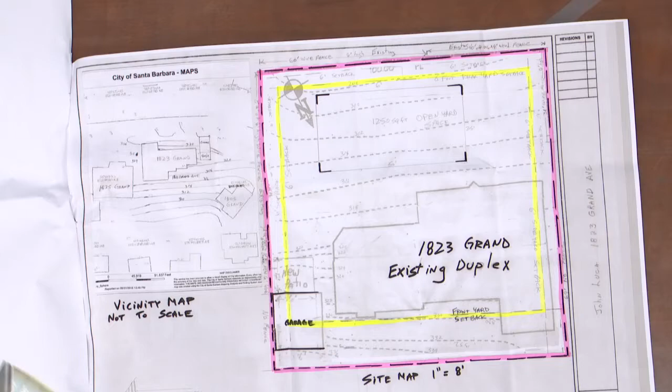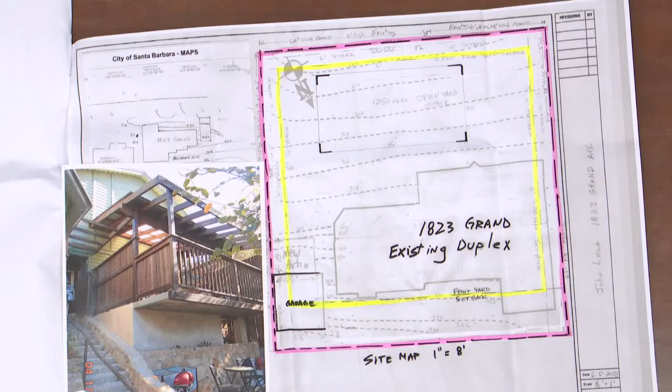This includes things such as the foundation under the garage being under construction without a permit, new electrical in the garage, the rear cantilever deck, the roof cover over the rear deck or patio, new windows and doors in the storage room underneath the garage, new incoming water plumbing line from the street to the house, and a washer and dryer with associated electrical plumbing and venting in the crawl space.

Let me flip. So the duplex is shown here, and this is the lower level, and so the washer and dryer was installed in this area that is existing crawl space.

So the project was reviewed by the Architectural Board of Review on February 20th, 2018, with favorable comments. They specifically noted the construction, the patio and patio cover, is compatible with what is existing and is not visible from the street.

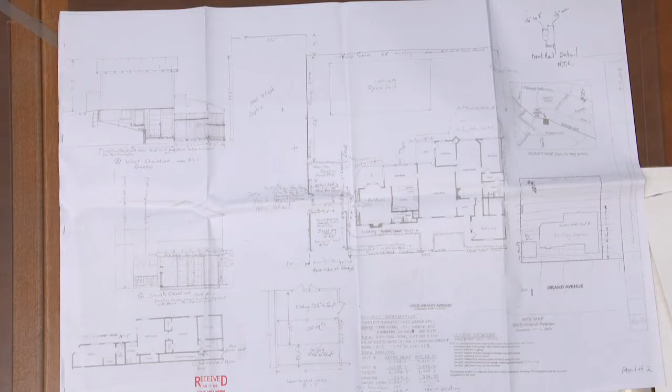The project does require what's called a minor zoning exception for the as-built doors in the storage room due to their nearness to the interior property line. And staff, the design review board, again, favorably reviewed the project.

Staff does have a recommended condition of approval that the storage room be noted as not habitable space on the floor plans, not to be used as sleeping purposes or a bedroom or something like that.

The lot is non-conforming to density with 2 units on the lot. With a lot of this size, slope, and zone, typically only 1 would be allowed, so it is legal non-conforming.

The legalization of the as-built work except the laundry facilities does not constitute new floor area. The laundry room is an allowable addition.

There are caveats that a maximum size of 50 square feet of new floor area for an individual unit is allowable. However, we do have a recommended condition of approval to note that the laundry room area in the crawl space would need to be walled off to make sure it's a maximum of 50 square feet and not the entire area becoming new floor area.

Staff is supportive of the proposed patio and patio cover in the setback due to existing screening from the street with the existing garage, existing screening from the adjacent neighbor with fencing and landscaping as seen here. The closest neighbor is approximately 40 feet away, so staff does not have privacy concerns or privacy impacts being anticipated.

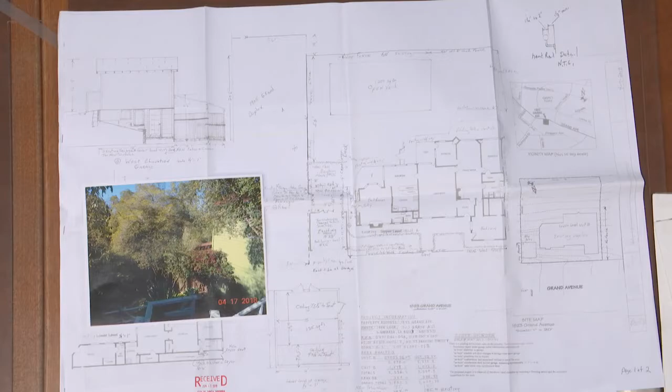I do have some questions regarding the number of things that occurred on the site without the benefit of a building permit, some of which are listed in the staff report. One is the foundation under the garage is under construction. What types of changes occurred to the foundation? Was it dug out and reinforced, or what was this area used for before? There are notes that it was storage, but what is the scope of the as-built work?

Basically, what happened was the olive tree next door had pushed the foundation in the rear, so the wall is like this. We got the permit to do that as the earthquake seismic retrofit, right after the fact. So basically there was a big hole.

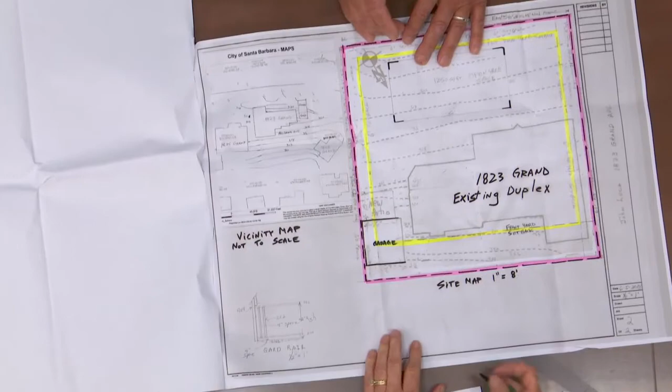So the garage right in here — the foundation had been removed when it was cited. Then we put all that back in using the seismic retrofit.

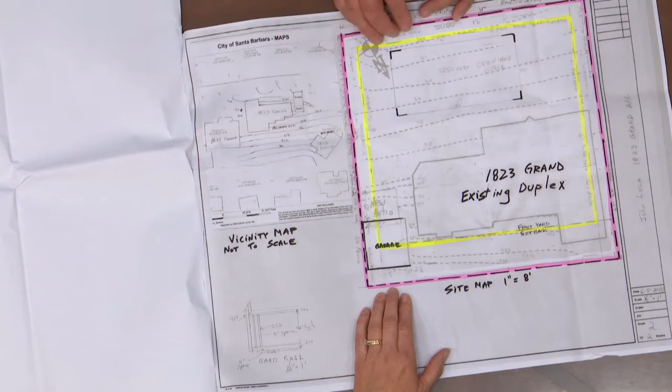But in the storage area here, what types of work were done as part of the foundation in this area? There was basically a slab put in underneath — it was just all dirt. This wall and that one were put in because it was the same problem as up here: the dirt on the outside was rotting the base of the wood, so we raised it up so it wasn't in the dirt. It was totally unfinished, and now it's finished.

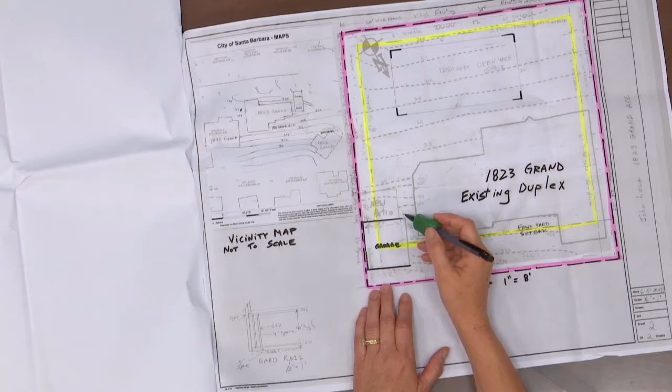What was the head height in that area? It's the same as now, like 7 feet. Okay, and then underneath it, I noticed here—

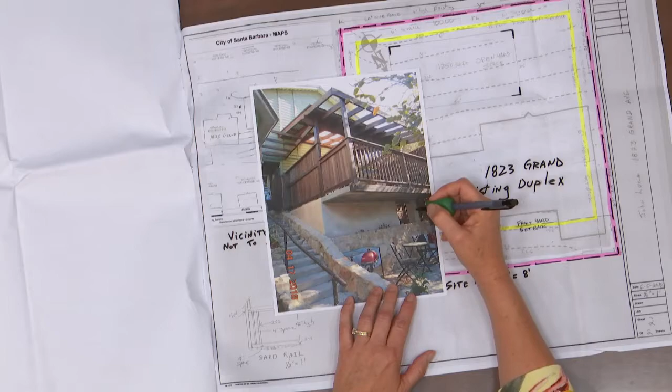In terms of understory, here's an opening. What's used underneath in this area now? That is all that's there, so it's open — it's still open here, it's not enclosed. This is all outside, this isn't in the garage, right underneath. So the garage is up here, and then there's storage underneath.

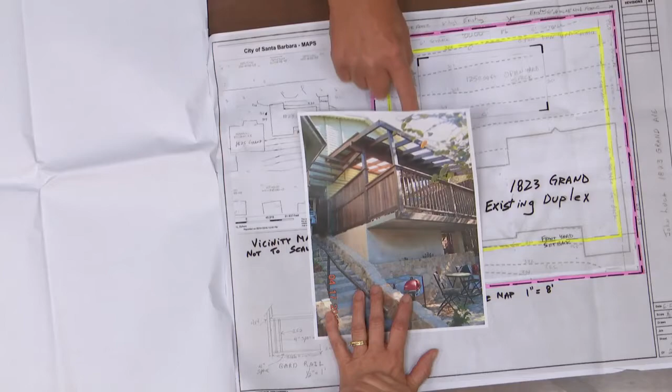And now this is all new here. What's under here, is it all dirt, open? No, it's all dirt. This is solid. If you like, right here, this is about where you're pointing.

Essentially there's this retaining wall that's 4 feet. Which is at this line, or is it behind it? So it's this one right here — this line is 4 feet, and it goes all the way across, and once it gets right to there, there's a post right here, and then there's another retaining wall right behind that.

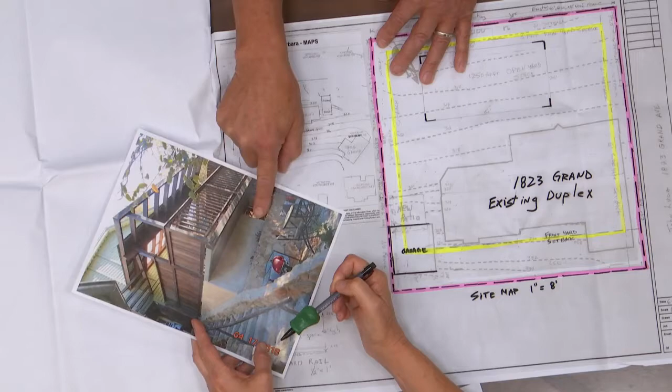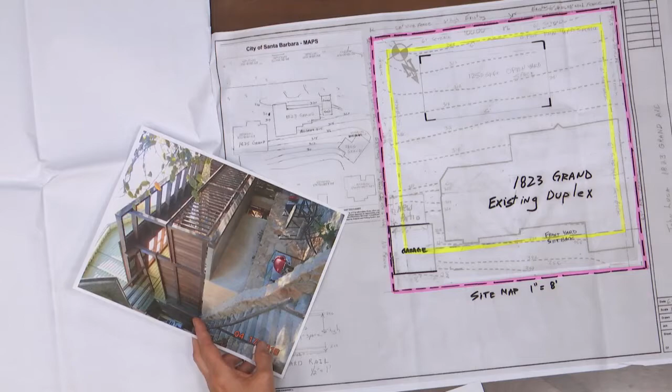So this right here — that's just on the other side? A little alcove that's probably maybe 2 feet deep and 4 feet wide or something. So what's behind this concrete wall here is not usable, additional usable area? It's not accessible — no, it's inaccessible, it's solid. Because this wall goes like this, and then it goes like that, turns the corner, goes like that, and goes like that, and then there's a post in that corner.

And yeah, there's just a little — you can kind of walk through it, but it's maybe like that high, that wide. Okay, yeah, I went to the site, I didn't pay much attention to that side, I was looking more elsewhere. Thank you for meeting me on site — you were down there looking at it, but it probably just didn't look like anything. It looks like more in that picture than what it is. For whatever reason, the light's shining in there — usually the light must have been just right at that time of day or the sun, because usually it just looks like a black hole.

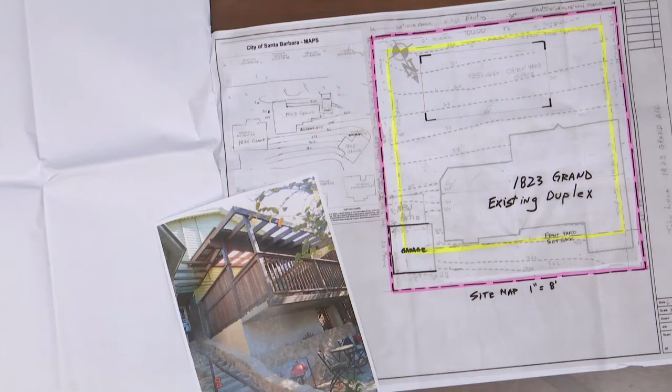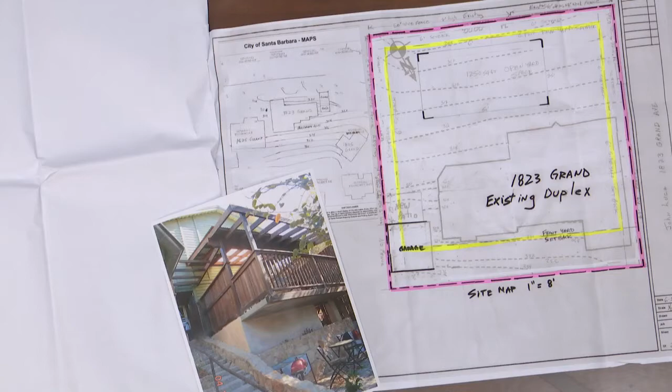That was my main question, to try to understand what kind of foundation repair was done, and also what improvements were made. Well, this is like a footing that's 2 feet wide and 1 foot thick, and then it's a retaining wall right to there — it's solid concrete from here all the way out to there, 6 inches thick, with 5/8 inch rebar in it. And it was to support the deck part of it? Right, for it, okay.

All right, that's my questions for right now. I'd like to open the public hearing, and I see no one in the audience. You've told me you haven't received any other ones. Crystal, we didn't receive any follow-up ones this morning? No. Okay, so I'll close the public hearing.

I did go out to the site, and thank you for meeting with me there. It was really helpful to look at it. My initial concern, well, any concern when you have a raised deck in the setback, is what kind of potential impacts you have to your neighbor, because they're large lots, but not huge lots. And the way the existing development is in this area, there's kind of houses dotted throughout.

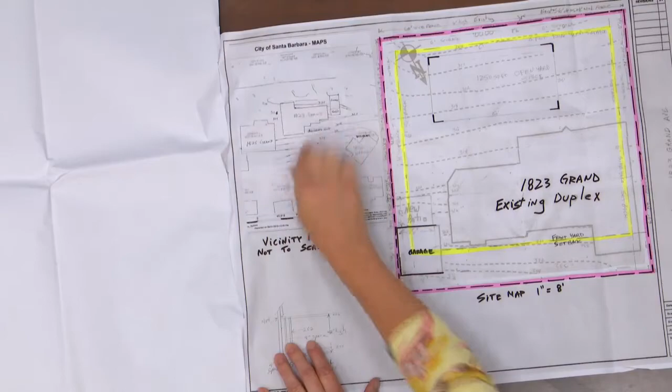In this particular case, here's your existing lot, and as Stephanie said, here's the closest house in this area, and it's accessed actually - I think there's steps down here, right? Yeah, there's stairs that go off this garage this way, and then there's one pathway that goes this way, another one that goes that way. Now, do they have a garage at all, or no?

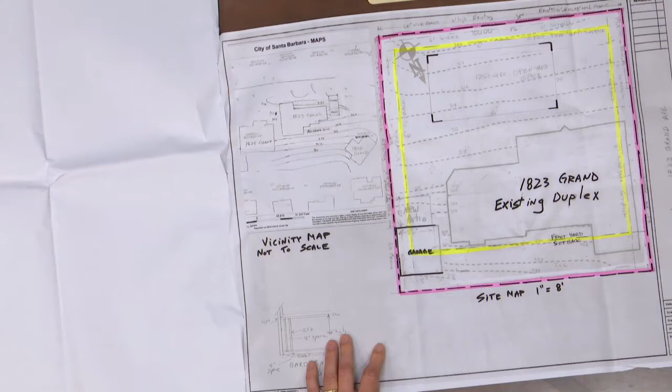No? Because I saw when I was there the first time, someone had parked here in your driveway and would walk down to get - well, when I was going through the historical records, it was actually this house and that house were on one lot at one time. Oh, huh. And so there's like an access this way. But then that's not been maintained or anything? No, it's not. I don't know how it all ended up the way it did, but it is what it is there.

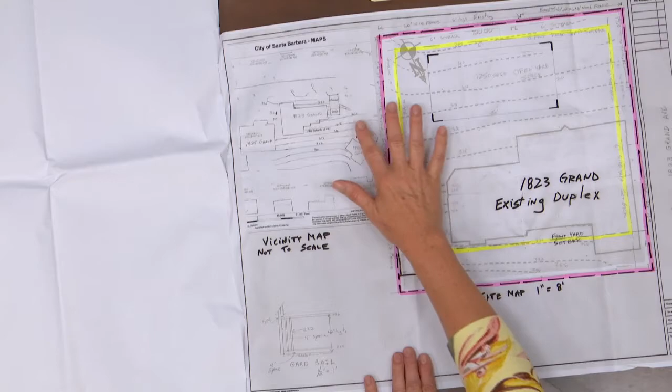Okay, well, back to your particular project. In regards to the requested interior setback, the existing situation is such that this house is so far away, and the slope of the topography, having the likelihood of something being built up here, is smaller. It is non-conforming, I think, identified in the staff report, so in terms of adding on and potential conflicts with the neighbors, pretty low.

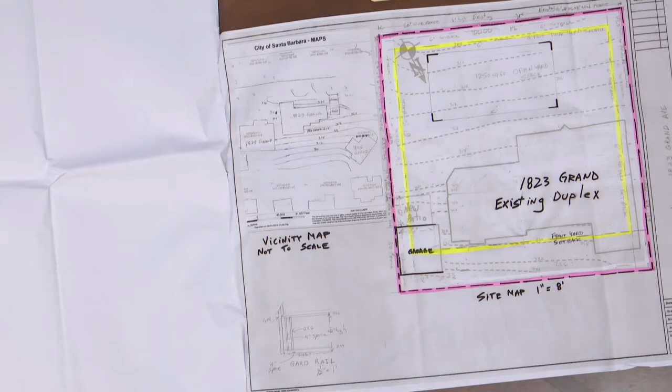So I would agree with what staff has to say in the staff report. My only concern would be that if indeed the as-built work involved the creation of new floor area - which would mean the existing non-conforming situation would be a 5-foot head clearance - and if it was found that it was dug down to create more than that, that is new floor area, and that does trigger a bunch of other reviews and zoning reviews.

So I don't know - excuse me. I know that door that you walked into, that was existing? Okay, that's how you got into that space. Okay, all right. So basically, it was just a dirt floor underneath the garage.

So the reference of... and so, even with the violation about the wiring - yeah, I found in the city records that the upper part of the garage had a permit for all the wiring, but the wiring had to start underneath there because that's where the panel is, and everything goes out of that basement area up to the upper part of the garage.

So the new doors that are referenced are on the space? Yeah, there were 2 windows there, and then we put 2 doors in. Okay, yeah. So that would be my only concern - if this patio now encourages that space to be used for something other than what it's permitted. But since it's already considered floor area, and it is unfinished area right now, I could make the findings outlined in the staff report.

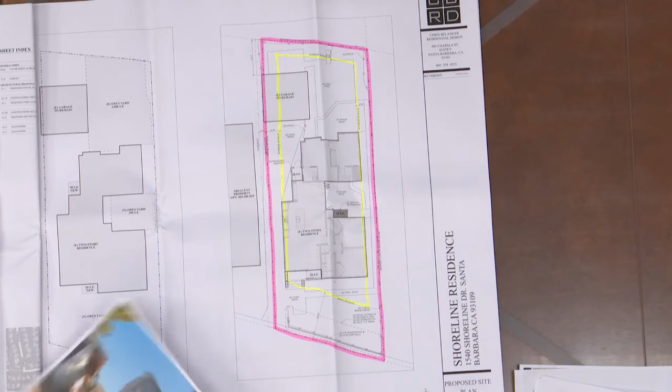The proposed project includes window changes in the western interior setback. Here's a photo of the existing western elevation.

An interior remodel, demolition of 2 closets on the first floor, construction of a mudroom at the rear of the first floor, and an addition to the second floor to accommodate relocated interior stairs.

The fence along the front lot line is also proposed to be decreased in height so that it's a maximum of 3 foot 6 inches within 10 feet of the driveway, including both the fence and the retaining wall underneath it. The project is in the coastal zone and a coastal exemption is applicable.

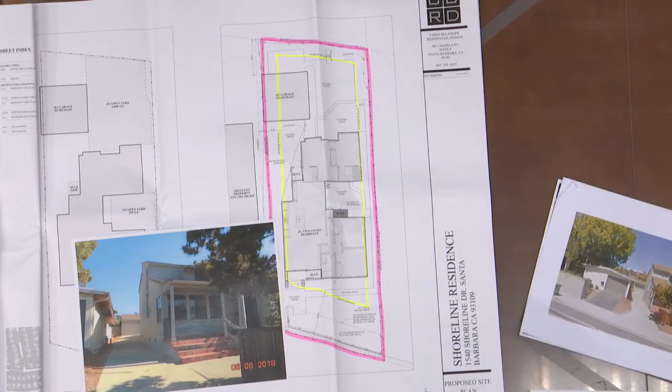The project was reviewed by the Single Family Design Board on April 30th with favorable comments. The development is non-conforming to its open yard requirements. However, the proposed addition at the rear of the house would not lead to a decrease in the open yard.

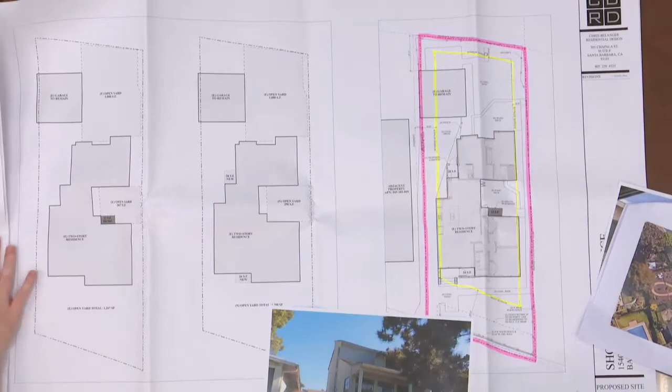So here we have a little diagram showing existing open yard on the site at approximately 1,000 square feet. There is a little bit of demo in this courtyard area, and a little bit of addition for that mudroom, and a little bit of addition at the front of the house, but the open yard would not be affected.

The development is also non-conforming to parking requirements since the existing garage isn't the standard 20 by 20 interior dimensions for a 2-car garage. And since the house has been enlarged by more than 50% since its initial construction in the 1940s, technically the garage is supposed to be conforming.

However, I have reviewed the project with transportation staff, and they are supportive of the idea of doing a transportation parking design waiver to allow the existing two-car garage to remain as it is right now so that it would not encroach into the existing open yard or affect any other aspects on the property.

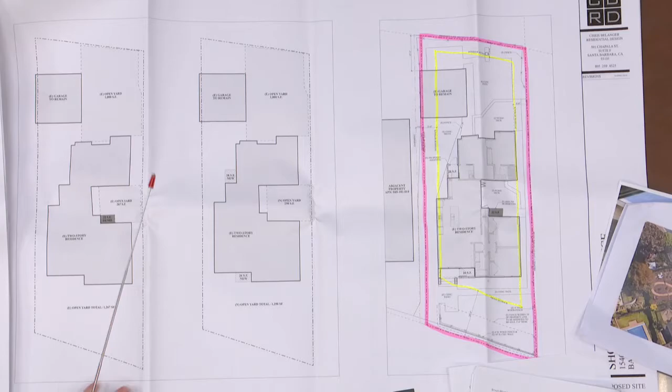With the floor plan configuration, we need to skip forward 3 pages here. So that with the interior remodel, there is a proposed master suite here at the back of the house with a sitting room, bedroom, and a full bathroom.

Staff does recommend a condition of approval for a zoning compliance declaration to note that only one residential unit is to exist on the site until at some point in time an accessory dwelling unit is permitted.

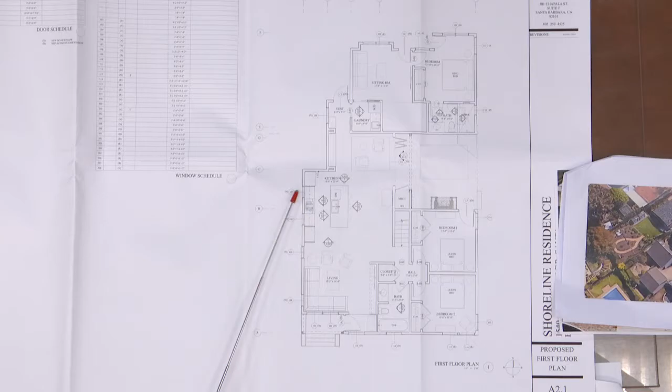In regards to the window changes, staff is supportive of the window changes in the interior setback. Due to the windows being elevated, they would be in this kitchen here, and they'd have an approximate height of about 8 feet tall. So it isn't really about looking out, it's more about letting light in.

And further, as we can see in this photo here, it would be overlooking the neighbor's garage. So even if they were lower, they would be looking at a garage, not living space or open yard space.

The non-conforming open yard would not be reduced as part of this project, and the down zone in the 1970s led to this non-conformity. As part of the project, the encroachment into the interior setback would not be expanding at all. It would be remaining exactly as is.

The project is exempt from CEQA under categorical exemptions 15301 and 15305. And finally, staff has received no inquiries about the project.

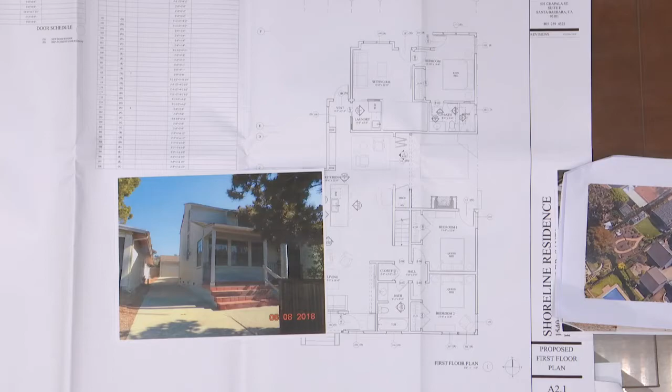Okay, great. Do you want to state your name for the record? Chris Belanger. Okay, and I don't have any questions for you right now, Stephanie.

I did want to point out one thing. When I was preparing for the show, I noticed this sink that was not on any of the previous submittals, and it is a drafting error. It is not proposed whatsoever. There is not and will not be a small countertop and sink in the backyard, floating in the middle of nowhere.

Sorry about that. Yeah, I do have a question. So this shows this is demoed. Then I was just noticing here, there's a fireplace here. Yes, there is an exterior fireplace going in out there. So it's new. That is correct.

And then you'll look at that in terms of encroachments in the open yard and stuff, if this is being identified as their... Yeah, we're actually looking to reduce the size of that also. So officially, the rear of the lot is the open yard.

In Title 28, it does talk about how open yard needs to be contiguous. So we did not feel that this area was technically open yard, that this area was technically the non-conforming open yard. Contiguous to what? Oh, so it has to come down like this, but you can have open yard in two separate areas. In Title 28? Oh, sorry. Yeah.